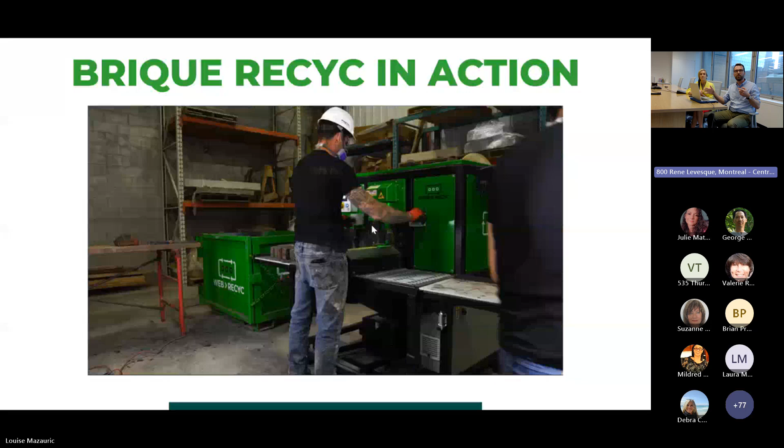But what does our machine actually do? It's a lot better to just show you than tell you. So this is our equipment. How it basically works is that you're cleaning your bricks in a two-step process. The first step is cleaning the brick with a grinder at the bottom left corner of the machine. Then the brick is going to run through two blades that remove the mortar on both faces of the brick at the same time. And at the end, you end up with a brick that's ready to be put back on a wall.

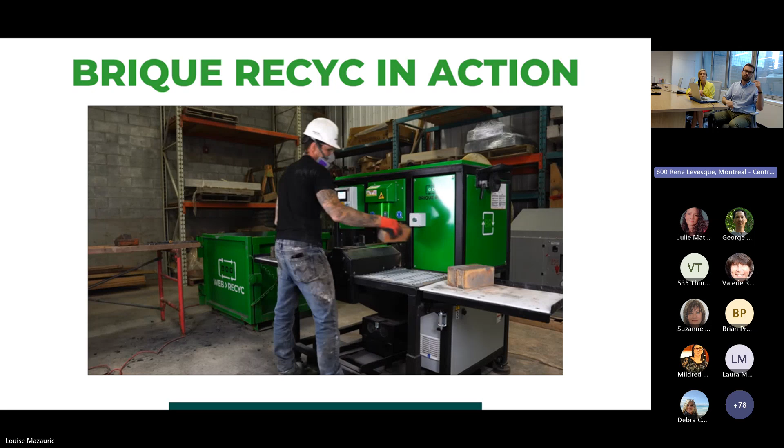As you can see, this is a 30-second video, and we did 3 bricks. So in good condition we can really do up to 6 bricks per minute on the machine. And right now, we're in the process of finding a new supplier for our blades, since our old one is from the US and subject to tariffs. With those new blades, we think we're going to be able to increase the speed of our equipment even higher.

So more on the technical side, as I've mentioned before, 3 to 5 times faster than manual cleaning methods. No percussion, that's really important. Instead of striking bricks with a hammer to remove mortar, we're using friction and blades, which means that we can fully preserve the integrity of the bricks. And that means 95% fewer broken bricks. And we can clean even hard and sticky mortars.

There's a lot of bricks right now that cannot be cleaned using manual methods. We even have cases in Europe where the only option to clean bricks before our machine existed was using jackhammers and things like that, because they were using a concrete-based mortar. With our machine, we can clean all those different types of mortars and allow bricks to be reused.

We're adjustable to all bricks, I'm going to say all bricks in North America. We had a case in Europe where we had bricks from the 15th or 16th century. They were a bit longer than younger bricks, let's say, and we had to do a little adaptation, a few tweaks on the machine to be able to process that. But in North America, we're adapted to all the different sizes of bricks that can exist.

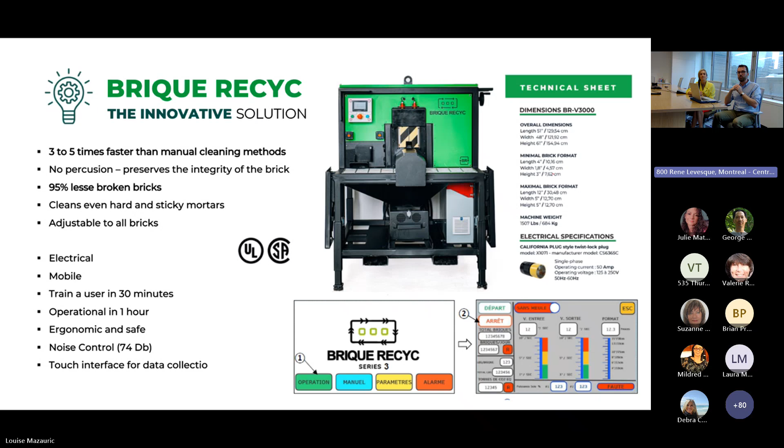From a dust collection perspective, that's really important. We have a two-step dust collection process where we have a cyclonic separator, and the dust ends up, this is an older version, already bagged in a Longopac unit, which means the dust is separated and goes in a bag that just needs to be tie wrapped together and removed. So there's not much dust going into the air during the whole operation.

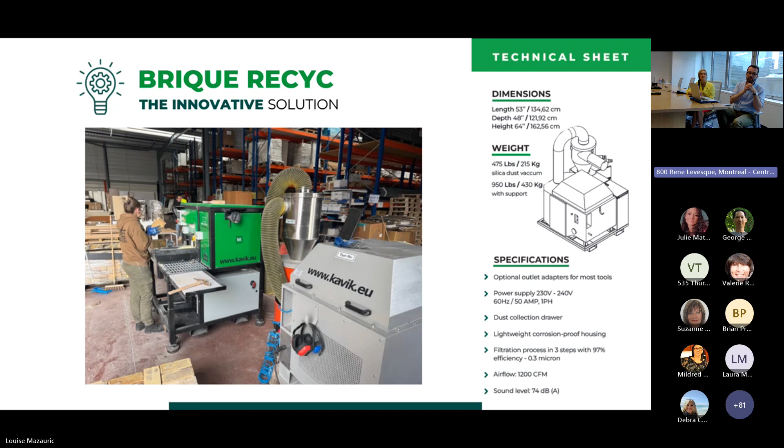And again, we're filtering with 97% efficiency at 0.3 micron. You have all the specifications to the right, but it's really cutting edge dust collection that we've designed specifically for the machine in partnership with our supplier.

In terms of cost, what does it look like to use our machine on a project? I love using this project as an example because it was a fairly big institutional masonry restoration project. We're talking about a $27 million total project with interventions outside and inside the building. Within that project, you had a $2.45 million masonry contract, and within that masonry contract, there was 3,500 square feet of facade to deconstruct, clean, and put back in place.

This is the project the contractor had originally planned on doing with manual methods, which means that when they prepared their bids, they had planned to clean that mortar with manual methods, and they had planned $68,720 to do that process. Using our machine, including labor, cost of the equipment, and all of that, they were able to cut that down to $25,200, which means they were able to get close to an extra $40,000 more profit out of that job using our equipment.

And it's a very good example because we're really talking about the cost of the brick cleanup itself compared to using new bricks in that specific project. If they had used new brick for that facade, buying those bricks would have cost $41,300 and generated an extra 18 tons of CO2 emissions for that project. As you can see, Brique Recyc was a very good solution for that project. Manual cleaning of bricks is about 1.5 times more expensive than using new bricks, which is about 1.5 times more expensive than using equipment to clean those bricks.

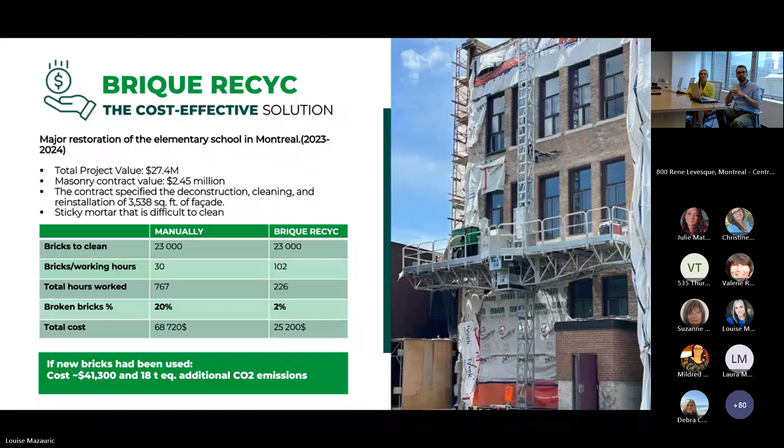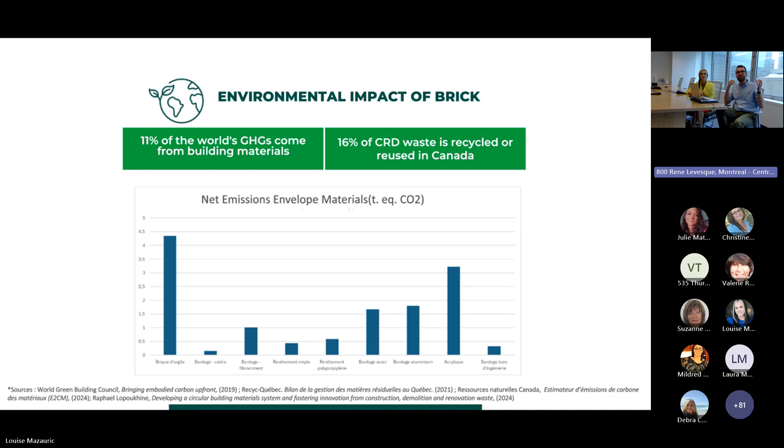And if we go further to talk about the environmental impact, as I mentioned earlier, on that specific project we're talking about 18 tons of CO2. Around the world, the construction industry is responsible for 11% of GHG emissions. In Canada, only 16% of CRD waste is recycled and reused. Even in Quebec, 32% of all our CRD waste is coming from the construction industry, which means that as an industry, we have a lot we can do to do our part in reducing overall CO2 emissions.

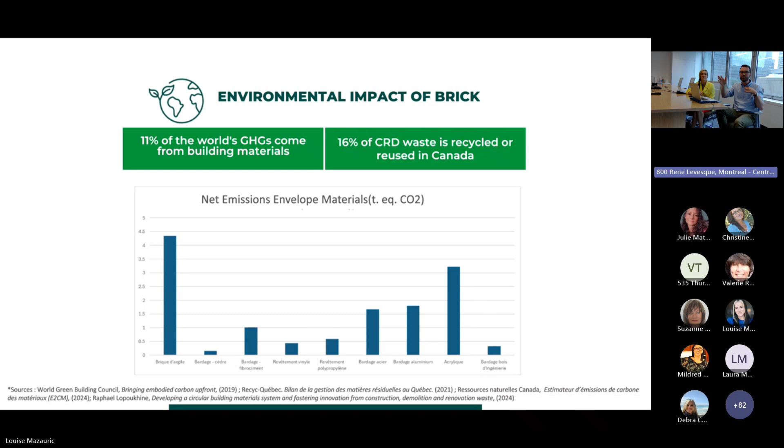And it's also an ideal solution because we're talking about intervention outside the building, so it's a lot easier to isolate than other options to reduce CO2 in buildings. I was talking to a project where they were even talking about cataloging and reusing all the metal doors on the project, and it was a big endeavor. And the actual CO2 reduction was much more from using bricks, which is easier to plan, and can even come with savings on the project.

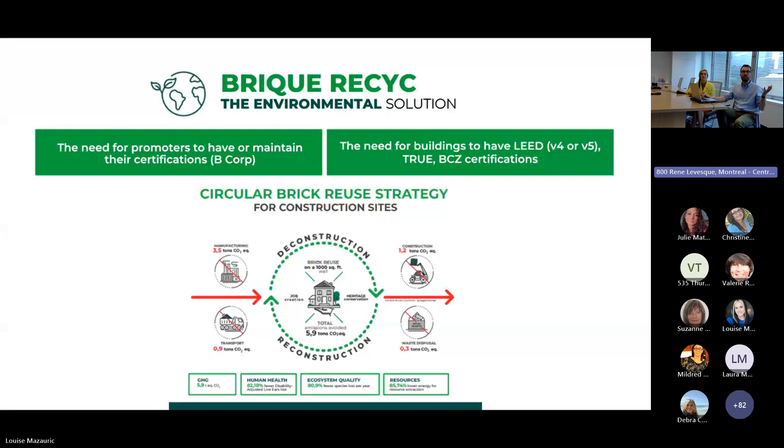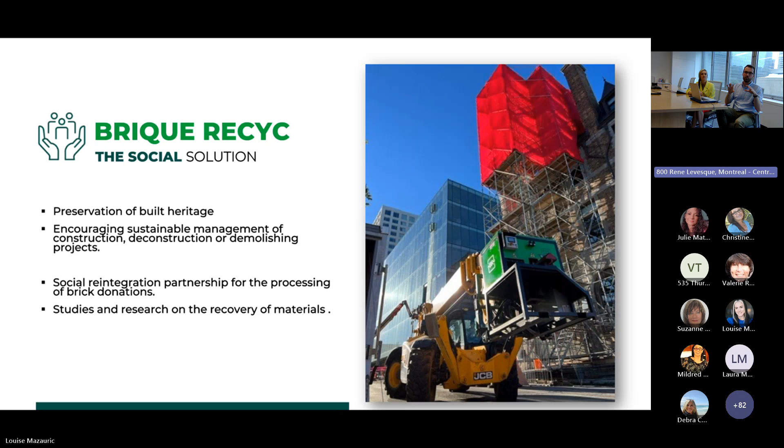And as I mentioned before, in terms of the social impact of our machine, of course, we allow the preservation of many more brick buildings than before, because we are using brick more efficiently. When we set up our offsite facility to clean bricks, we're also partnering with either correctional facilities, where our bricks are cleaned by prisoners with good behavior near the end of their sentences, or with partners that employ labor with light handicaps. We also partner with other companies around recovery of materials and carbon reduction solutions to be able to offer integrated solutions.

So we talked about the machine, we talked about how it works. Brique Recyc, it's more than just a machine. So our goal at the end of the day is that in 5, 10, 20 years, no good bricks end up either in the landfill or brought down and used as aggregate, so that every single good brick is clean and can be reused on an actual wall.

So that means that in order to be able to process every single brick, we've developed an ecosystem of solutions around Brique. So of course we can rent a machine to be used on the job site. It's usually a good solution when you have more than 20,000 bricks to process, which is, let's say, over 3,000 square feet of brick wall to process.

We also offer turnkey cleaning solutions, either for smaller jobs or for bigger jobs where the contractor, the client, do not want to start using the machine and go through all the planning around that equipment. Our turnkey solution involves collecting the brick on site, bringing it to an off-site facility, like the one we have in Sorel-Tracy in a correctional facility, cleaning those bricks, palletizing them, and bringing them back ready to use on that job site.

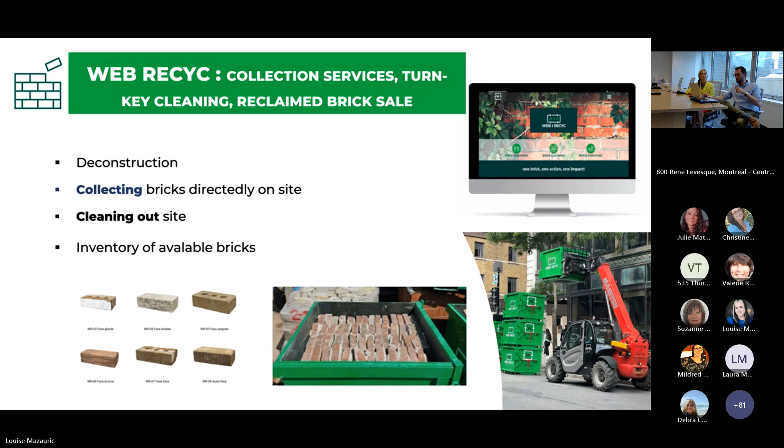And in terms of expertise, what we offer is first pre-project services. What that means is the sooner we're involved in the project, the better, because we can really help. We help architects and clients, even going to see their building. We can do estimates of the amount of brick that can be reused. We can do exploratory openings. We can test bricks to make sure that they're still good to be reused.

We can do a lot to make sure that at the beginning, when we start cleaning up the bricks, we know that we're going to be able to reuse them, either on this project or on another project. We also support architects and clients in writing their specs around brick reuse.

We help at the estimating phase in terms of planning how the equipment is going to be used and what the costs associated with that are going to be. During the projects, we're going on site. We're supporting whoever is doing the deconstruction of the building to make sure to do it the right way. We're also there to assist the contractor on how to best use our equipment. Sometimes it's putting the equipment on site, sometimes offsite at a secondary location. So we're there to help them use our equipment in the most efficient way.

And at the end of the project, we're set up to do a full carbon footprint analysis specifically for the project, based on where it is and where the new bricks that are being replaced by the old bricks would have come from, and do a very good estimate of the amount of carbon emissions that have been saved. So basically, we offer a full suite of services to reduce as much as possible the friction around using a new technology just like ours.

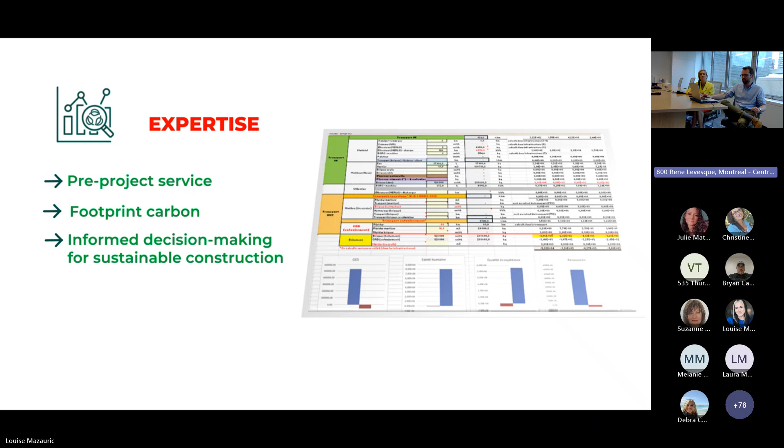So a few project examples. The one to the left is in Detroit, where they were converting an old factory into apartment buildings. They decided to clean about 10,000 bricks and use them for the facade of the building. I have a picture in the top right corner of one in France, where we have a partner that has the machine, and that's cleaning bricks for a client that are going to go back on this job site

to be reused. The one on the bottom is in Montreal on the Atwill Morin job site, and it's really cool because you can see that the machine is very portable. It's on the top of a scaffolding. Sometimes, depending on the project, it can make sense to have the machine on the scaffolding, so that when you remove the bricks, you can clean them, and they leave the scaffolding already cleaned and ready to be reused.

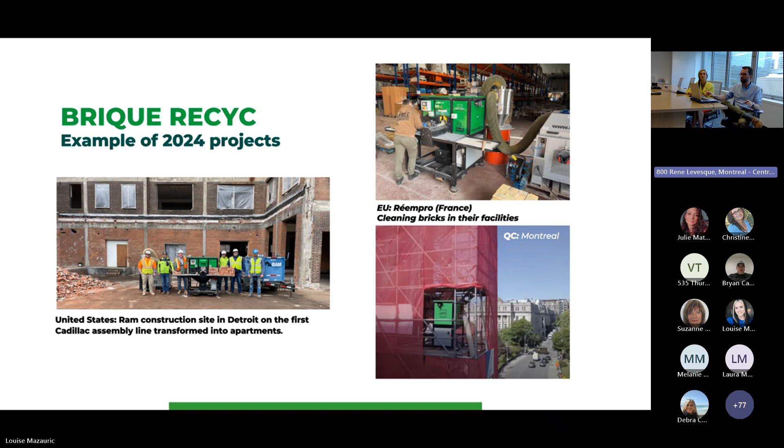This is a job site in Verdun. Brique Recyc was invented at the beginning to fill a need our masonry company, Maçonnerie Gratton, had, which was how can we more efficiently clean our bricks. We were mostly doing restoration work in our area, and on 20 to 50% of our projects in a given year we had bricks to clean. So we developed the machine to fill our business need, and we mostly used it at the beginning on actual residential projects, as you can see here.

The project to the right is also an interesting one because the access to the site was very, very hard. It was in Côte-des-Neiges in Montreal. That's a job site where even delivering new bricks would have meant renting part of the street, offloading the truck on the street, and bringing the bricks to the job site. It would have involved a lot of labor because the access was very, very tight. By bringing our machine, cleaning the bricks and using them, they were able to cut their costs significantly on that job.

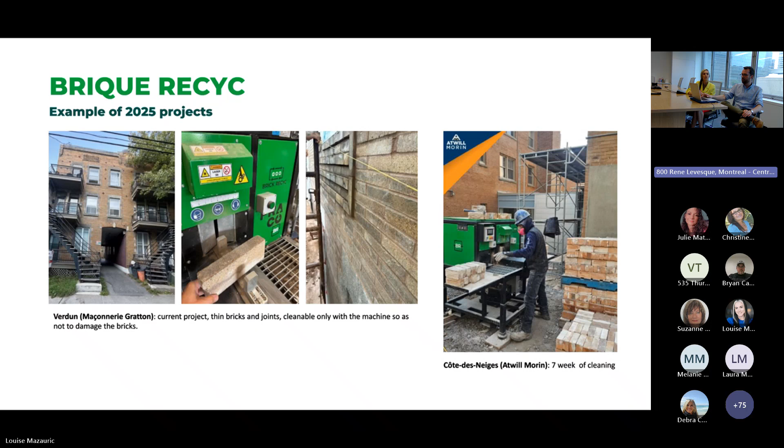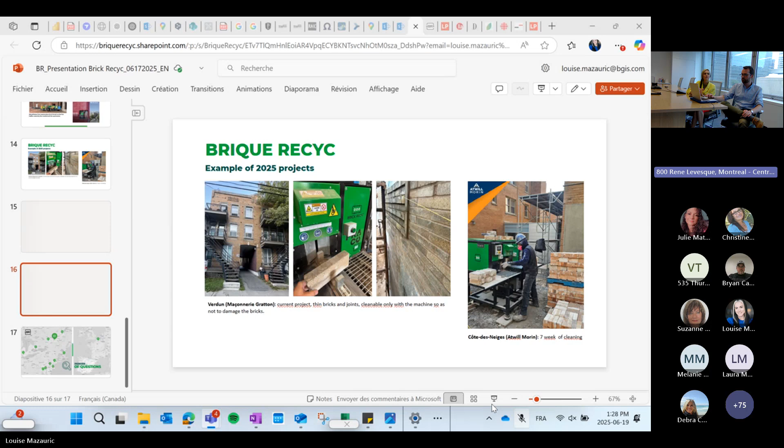And the next one. It's thinking. Maybe Julie, can you open the PDF you have? See if I can. It's downloading. Is it uploading the video? Is it a video or? No, it's just the last two slides, but that's fine. I'll keep going. That's fine. I got it. So, in terms of, and here we can see. All right,

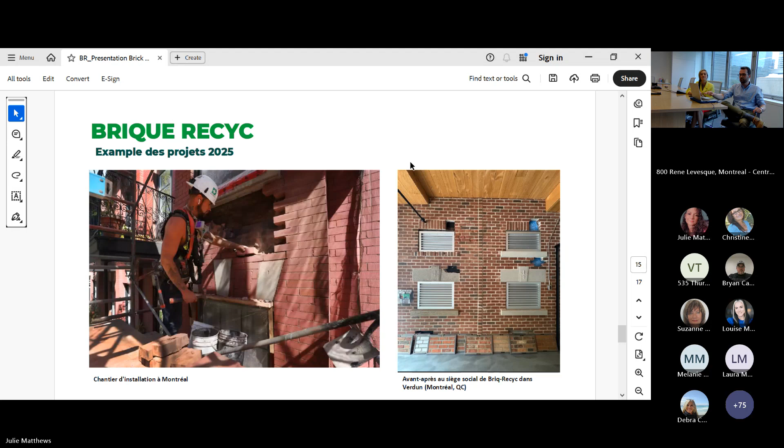So right now we are. It's another one. It's not my presentation.

Oh, and here that's another project in Montreal where we can see the before and after of what a masonry renovation can look like when you reclaim the bricks. As you can see on the left, there was already a different intervention done on the building, and you have bricks with different patinas all over. So when we put them back on, we made a pattern to have a uniform look over the whole building, which I think looks pretty nice.

So we're at Brique Recyc right now. We are commercializing our machine. We now have a rental fleet in Europe, where we airlifted 3 machines last month to meet the demand that we have there. We also have equipment in the US, mainly on the East Coast, but we're in the process of having a first project in the Los Angeles area.

In Canada, of course we're in Montreal, Quebec, the Ottawa region. We're starting to have projects. We actually have our first big project in Toronto starting next week. We're driving a machine there tomorrow.

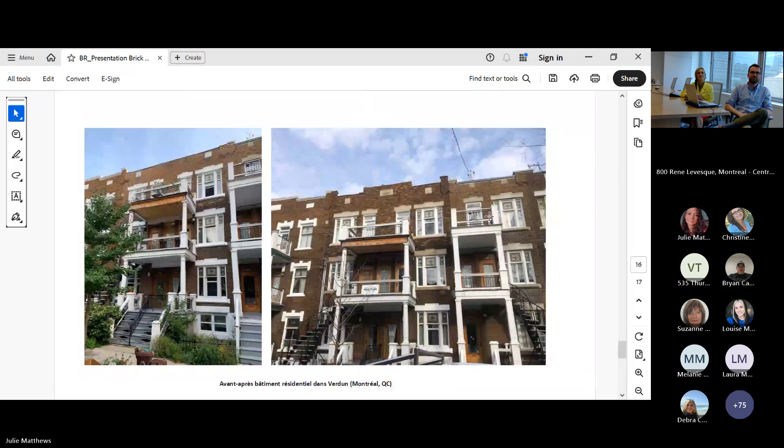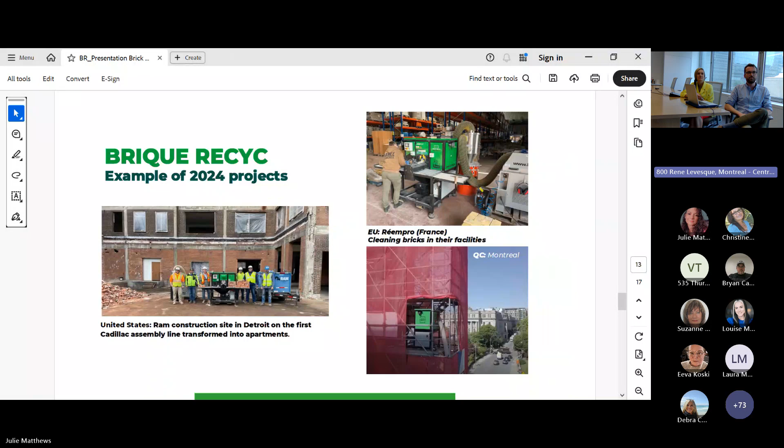Yes, Eeva. Hi, Eeva Koski. I'm on the Heritage Conservation Program here at BGIS. This is a really cool machine. I noticed one of your projects was in Philadelphia. Philadelphia is really famous for their black bricks that have a black glossy face as a result of the firing process, where they have black ferrous oxide deposits.

Would your machine be able to preserve those kinds of heritage qualities that are visible on the surface, like the patina of an old brick, the uneven surfaces, that kind of thing? Or does it clean all six sides at once? That's a very good question. Thank you for your question. So our machine was made to do restoration work.

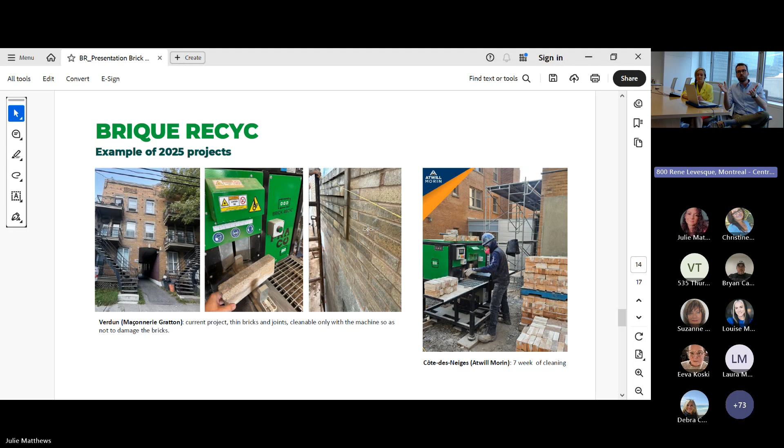So we really made sure that we're just touching the actual surfaces which have mortar on, which means top, bottom, and the heads, and we're leaving both the facing side and the other side of the brick untouched, which means that we're preserving the integrity of that brick, because that's the part that's been treated to resist ice and rain and all of that. And we're preserving as well the patina of that brick.

For special types of bricks, like with glazes and stuff like that, what we like to do pre-project is send a few bricks to our machines. We run them in the machine. We make sure that the result looks great, because you never know sometimes with those types of bricks. And if the brick's a good candidate, we can recommend using machines for those bricks. But generally, we're able to preserve the integrity and the patina and all the characteristics of that brick, so it can be reused without any issues.

Awesome. Thanks so much. We have a question in the chat. So I'm reading how you use the term cleaning. Is it restoring too? Life of brick is extended by how long? I imagine it varies. Price difference between old and new. All right. There's a couple of things in that question. So cleaning and restoring, I'm using them interchangeably.

So we're not necessarily extending the life of the brick, because brick is a material that, in good condition, can last hundreds of years. Usually when a wall is going to fail, it's going to be because either the brick hasn't been installed properly, or you're going to have failures around the anchors of the walls, or failures due to other things on that building. In Europe, we're cleaning bricks that are 100, 200 years old, even in Montreal, 100 years old, and they're still perfectly fine.